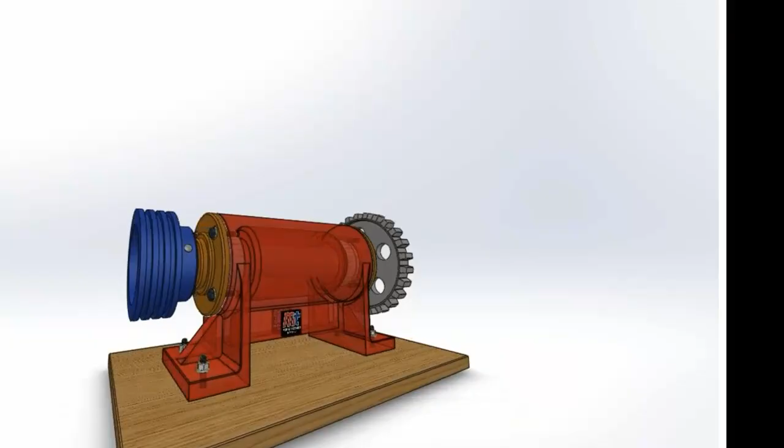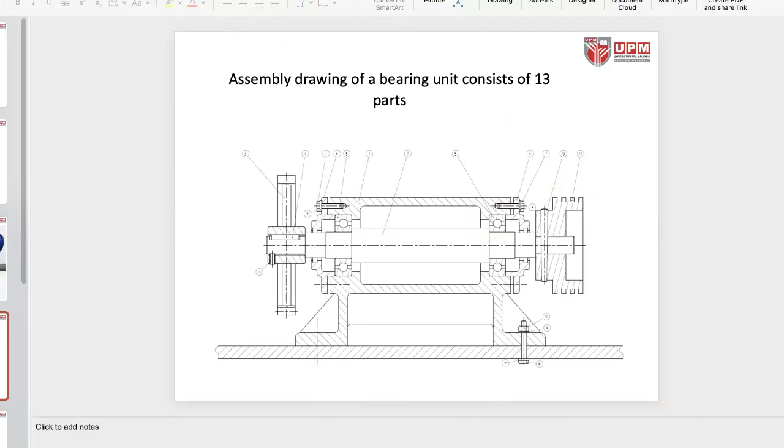Okay. So this is the assembly. We will start with this first guy, which is the base of this. Okay, so I'm going to save this as a picture so that I can insert it into my AutoCAD later. So this is lab number 2, activity number 1.

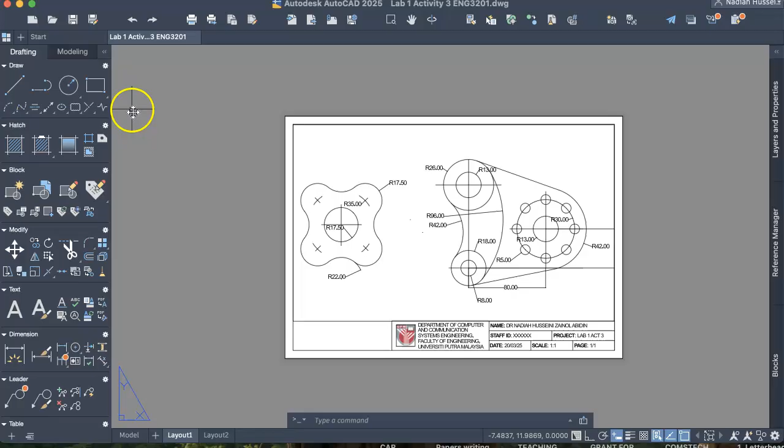Okay, so when you open your AutoCAD, click on File and then Open, and you would initially get Drawing, but you would select Drawing Template instead. And then find the A3 template that you did before, click on that. So you will get your template again. Then remove this because it is a template anyway. So we don't need that object anymore. And then we can work in model space as usual.

Okay, so now I'm going to insert. Where's the insert button? I am going to insert. Is it drawing? Okay, I can't see. Okay, remove this. Okay.

I think there's some construction going on, so I really apologize for the extra noise.

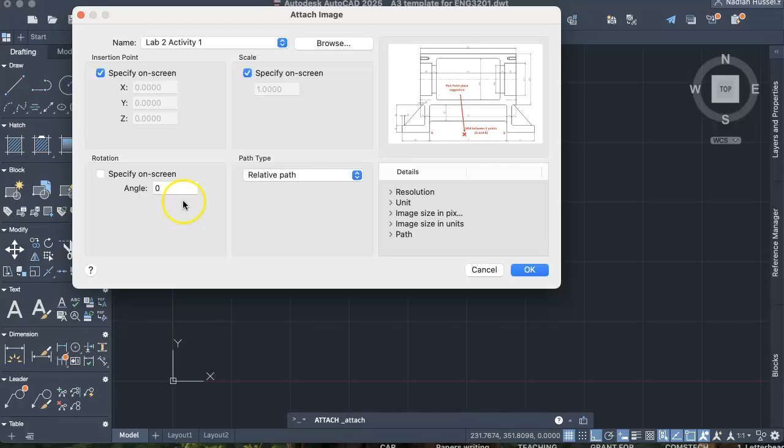What was I gonna do? I was gonna open the lab diagram. Specify on screen. Okay. Okay, so hopefully we can see better. Alright, so please refer to the PDF or the file in PutraBlast if this is not very clear in YouTube. So we will start with this main box over here.

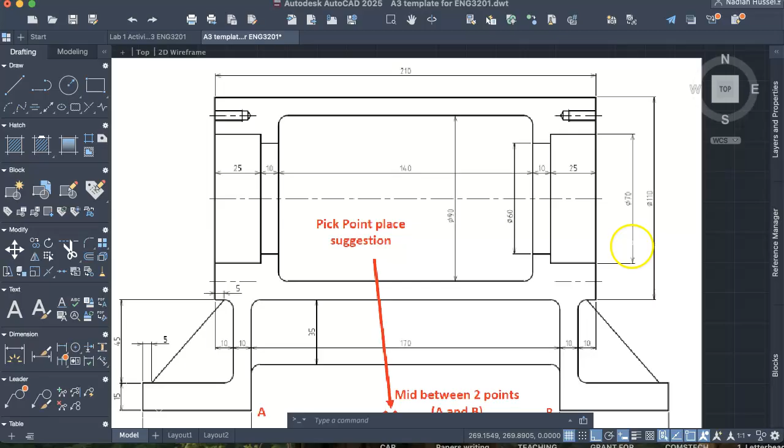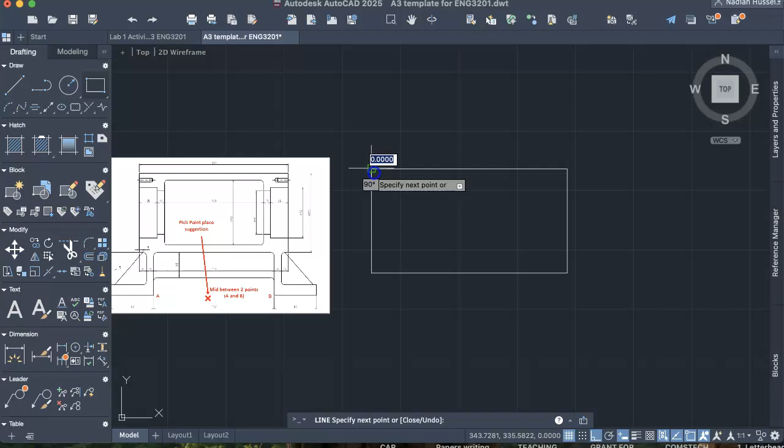So this box at the top has a size of 210 in the x-axis and 110 in the y-axis. So that is what we're going to do first, 110 and 210. 210 to the right. And make sure we're working in ortho mode. So 210. And then going down, it is 110. So this will be my box, my initial box. Make sure you're following the guide so that your dimensions are accurate.

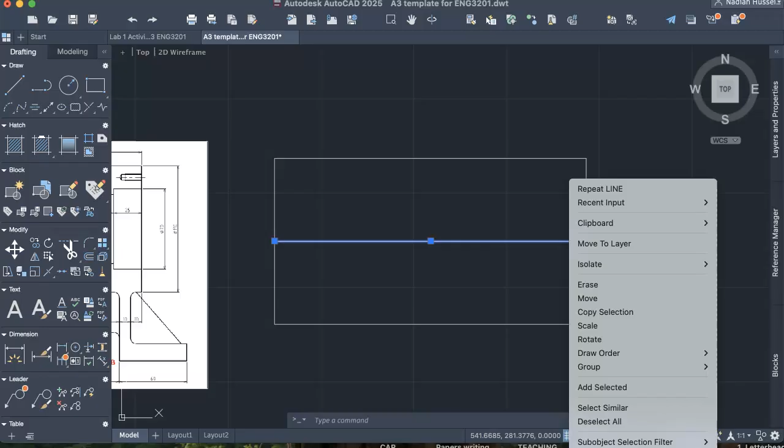Okay, and then let's make our center line. Our center line is at the midpoint of this 110. Okay, let's just do that first. Our center line at the midpoint. Then I'm going to click on Properties and then Line Type. And it should load center 0.5. Okay. Properties, I did not select it yet. So you can see here, it's still selecting continuous. My bad. So now it's center line.

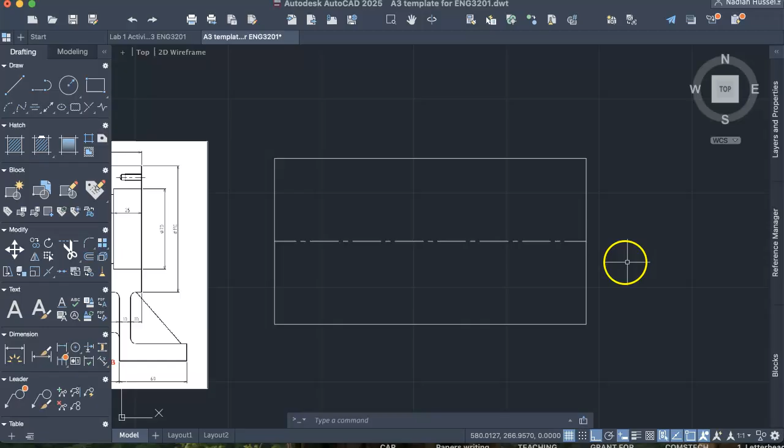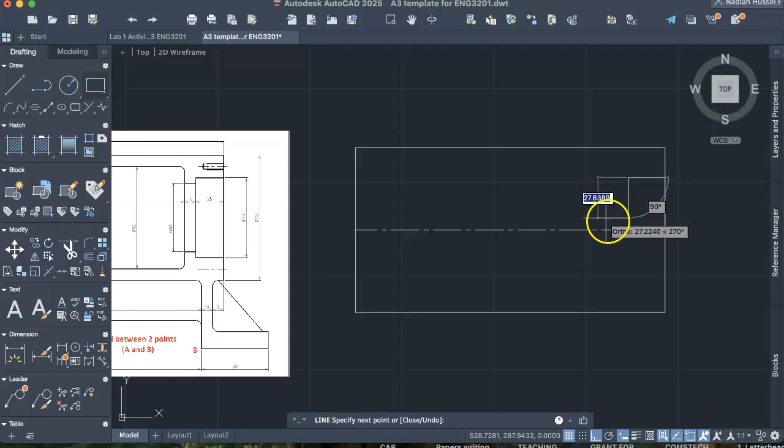Okay, so now the next part that we need to do is make this 70 in diameter box. So it says diameter because it's actually a circle or a cylinder viewed from the side. That is why we have a cylinder. And then the sides here is 25. Make sure you're still in ortho mode, and this is going to be 70 and then 25.

Okay, and the next part is making this; this has a diameter of 60. So again, it is symmetrical, 60 diameter. The midpoint is still the same as the 70 diameter. So we're going to extend upwards by 30 and extend downwards by 30. And then this will be 10 in the x-axis.

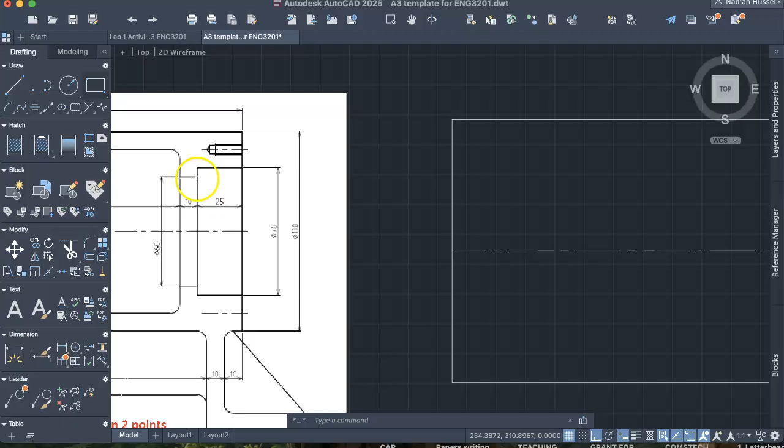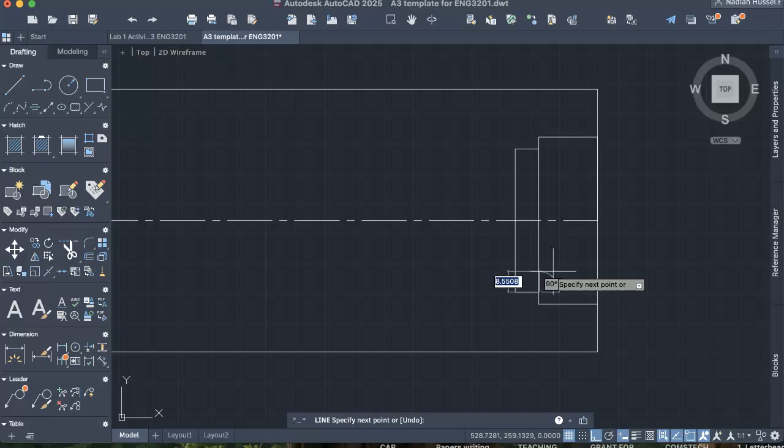So extending by 10 first. Make sure you're in ortho mode. Enter. Going upwards by 30. And then 10. And then I can do this in offset. I can just do this manually. Doesn't matter as long as you know what you're doing. As long as it's accurate dimensionally, it's fine. So we have that. Okay, what's next?

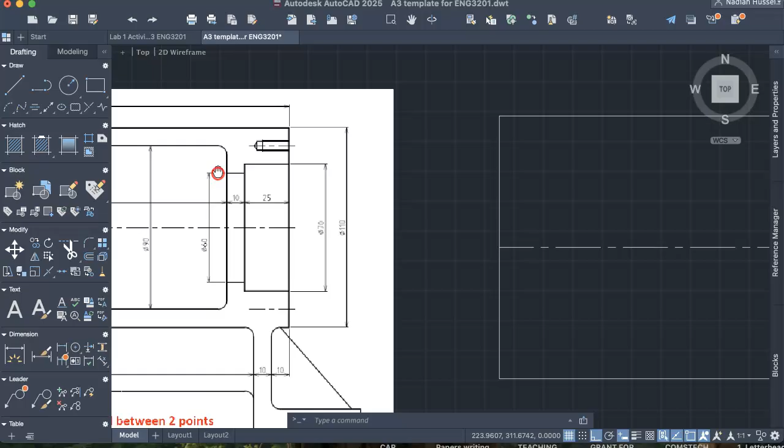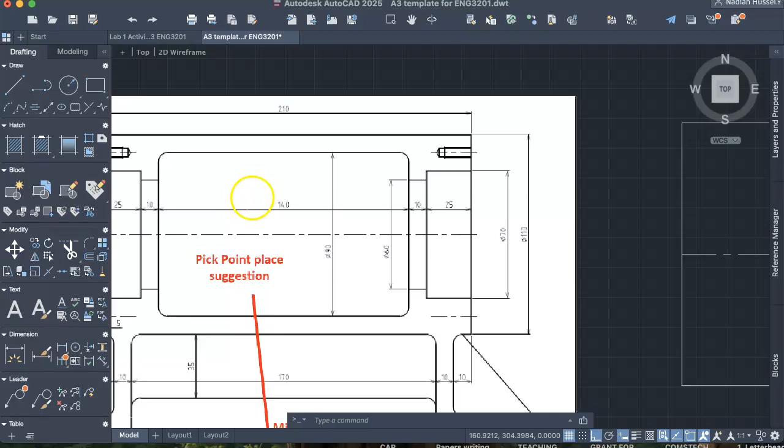Now this guy, 70. So at this point this length would be 35, right? Okay, let's move forward from here. This would be a box of size 90. It still has the same midpoint, 90, and this is 140. 90 and 140.

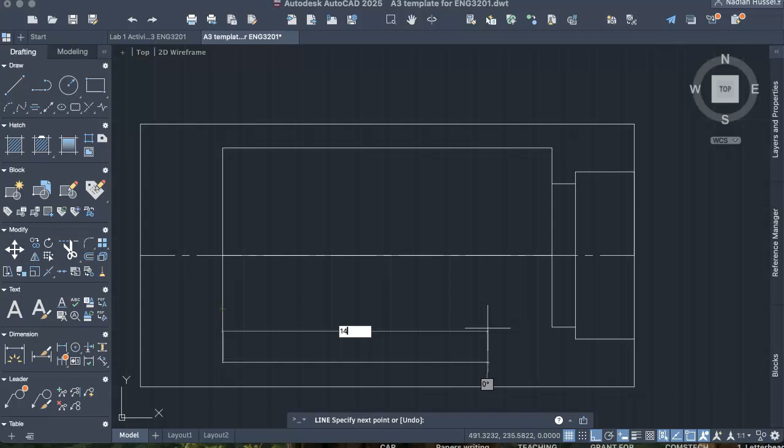We'll start here. I'm going to make a 90. Oh, I think that was 140. So 140 in the x-axis, and then 90, which means that it's going to be 45 going upwards, and then 140 going in the x-axis. I'm going to continue. That would be 45, 140, and going upwards 45. So that is the box that we're working with.

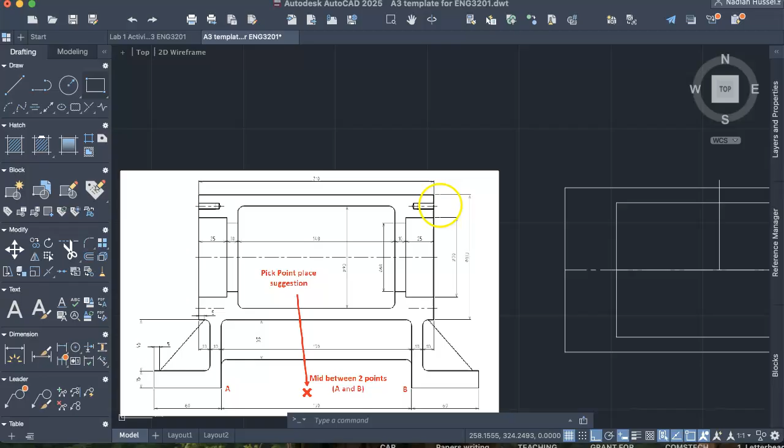Now, where is my midpoint? Do I have it? I'm going to make a midpoint really quick. I want to mirror this because it's basically the same thing. Let's see. Is it really the same thing? It should be. So we can do this part first, or we can mirror this guy first. I guess we're going to mirror it first. We can figure out this one later.

Before we can mirror it, is there anything else that we need to do? I think we are okay. So let's mirror it at this midpoint. So mirror.

I really do apologize for the construction sounds.

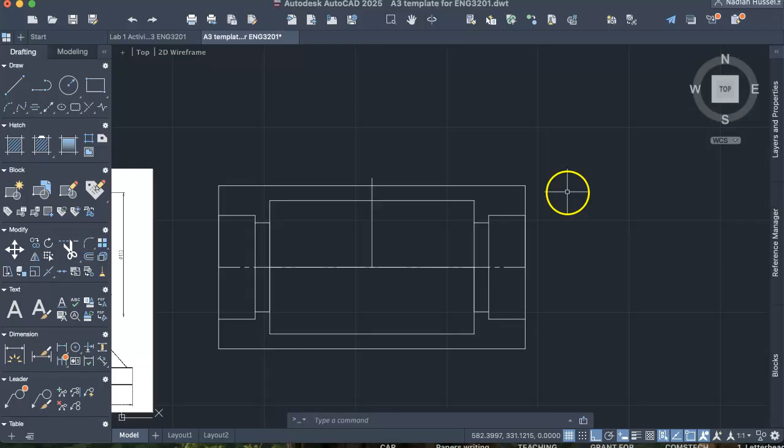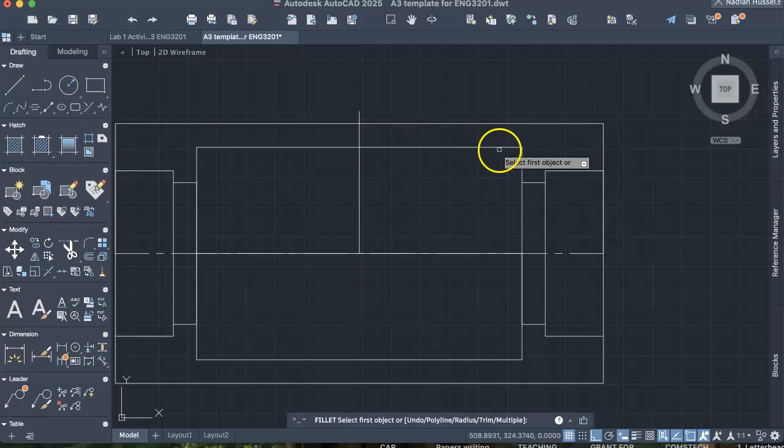Enter. So now you have a similar structure on the other side. Okay, so this fillet, I don't think we are given the dimensions, but we will try and figure it out. Let's try with a fillet radius of 2.5 first and see if it looks okay. Yeah, pretty accurate. So again, I'm gonna do fillet.

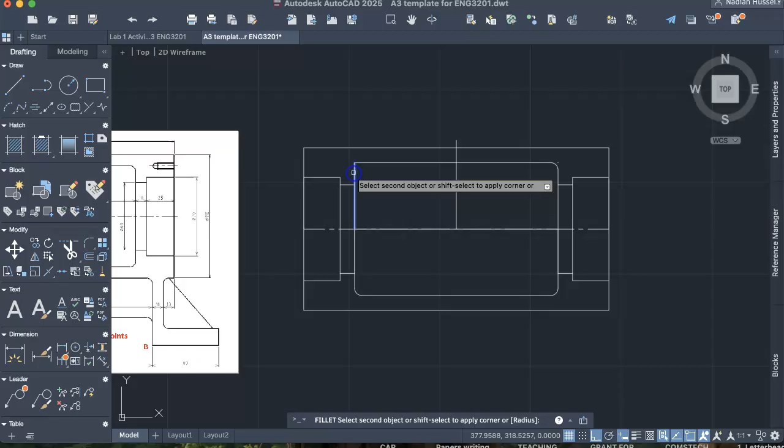Okay, to be honest, I don't remember what the radius is. Let me double check. Fillet radius. Right now, the fillet radius is 5. Enter. Okay, so it's not 2.5, it's 5. Then we have a small dot here, which I don't know why. Let's get rid of that. So now our fillet is successfully done. Let's make this guy.

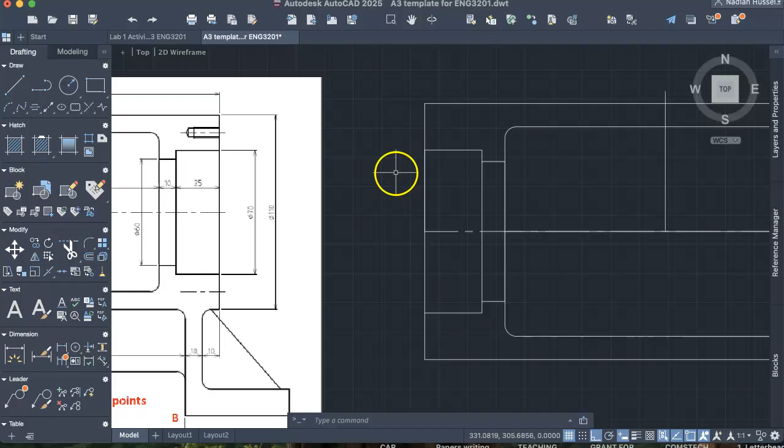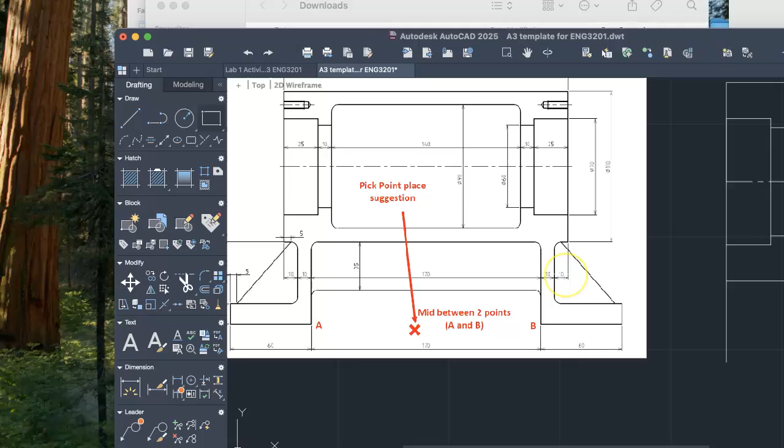Now let's do the lower part of this diagram. Okay, so we will start like how we started the top box. Let's try to imagine that this is a box as well. So this box, if we are extending it here, it is going to be 20 plus 170 plus 20 on this side, which is basically 40 plus 170, which is 210, similar to the box above, but the y-axis of this box would be 45 plus 15, which means that it's 60 instead.

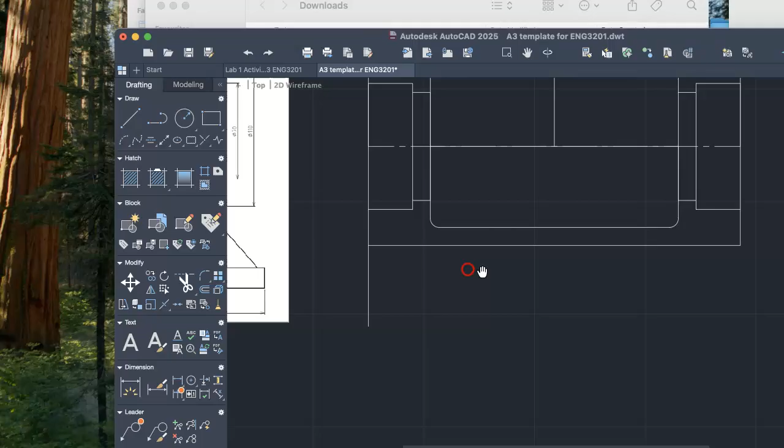So let's make that box first. So the box will have a similar x-axis, but now our length will be very specific to 60. Why is it not working? My object snap is not turned on. Okay. I am going to make a line that is 60. I'm just making this box, following the guide, making sure that everything is accurate. That is my box. Okay.

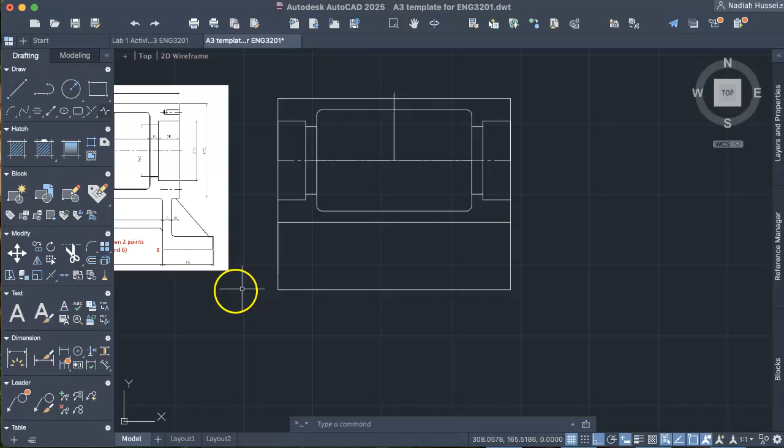What should be next? And then we have another box inside this box, which is 35 from the top. And then it is symmetrical by 170, which means that 170 divided by 2 would be 85. So 35, 85. So find the midpoint, go down by 35, and then I'm going to make a line to the right, 85. Make sure I am in ortho mode and I am still 35, so that it is still correct.

I'm going to make the same thing over here. I can mirror that, but I can also do it manually. 35. Whoopsie, I think I got that one wrong. 35. Always make sure you are in ortho mode. So we have the inside part done.

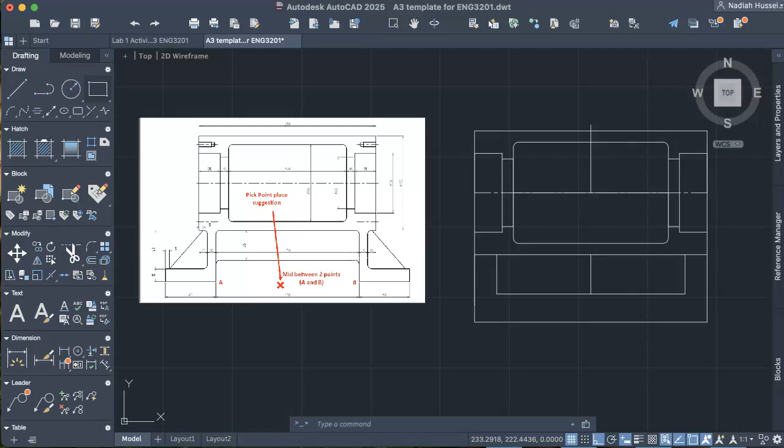So this little thing is 15 going upwards. I'm trying to make this hollow part, 15 going upwards, and I need to go 60. 60, make sure you're in ortho mode. 60 going up, 15, and then this would be 170 going down. That would be 15 again.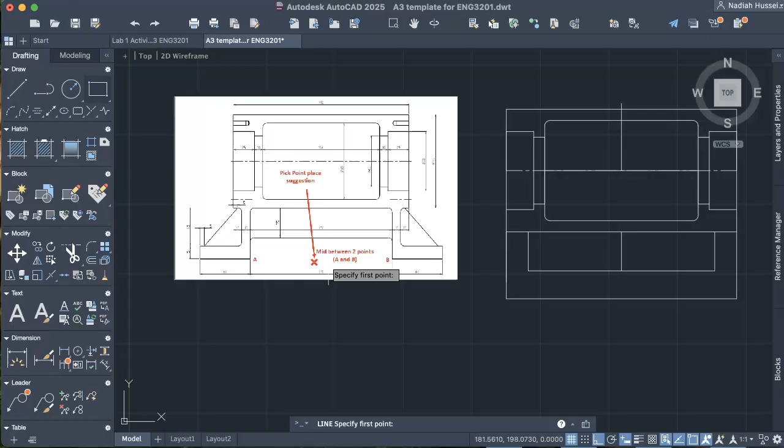Oh, my bad. Oh, I think I got this one wrong. Okay, let me try again. So it's not 60 from here, it's 60 from this side, which I did not do yet. So that was the mistake. Okay. So 60, we have, this is 20, so I need another 40 here. Alright.

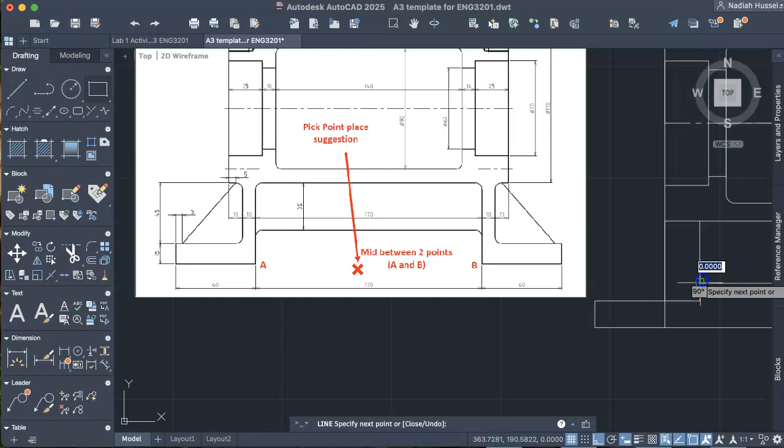I'm just gonna make it first. And then I'm going to extend by 15. And this is going to be 60. Like that. So this is supposed to be 15. Let me just double check really quick. 15. And this is supposed to be 60.

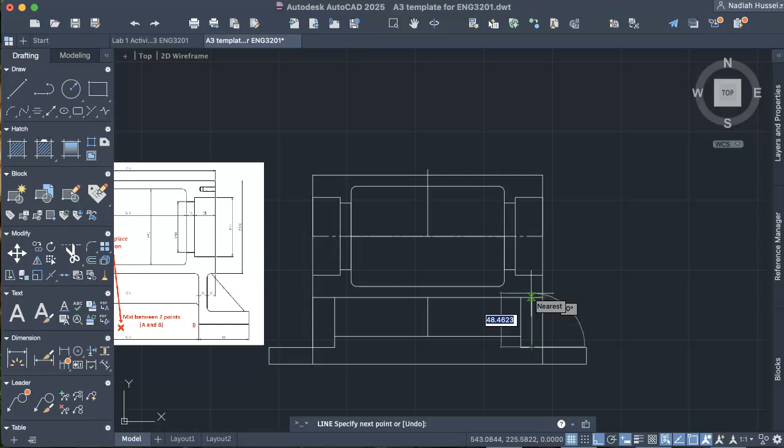Okay, again, extending this by 40. Going upwards by 15 and going inside by 60. I would connect this like that. And then this from here to here would be 10. And going upwards, the distance would be 45 if everything is correct. Make sure you're still in ortho mode.

Okay, so it looks a little bit confusing here. Let's trim it and figure out if we are doing things correctly.

We need this. Where is our 15? This is our 15. Like that. This should have been extended. So that is wrong for me to get rid of. I should have done mirror. My bad. So 60. And then trim.

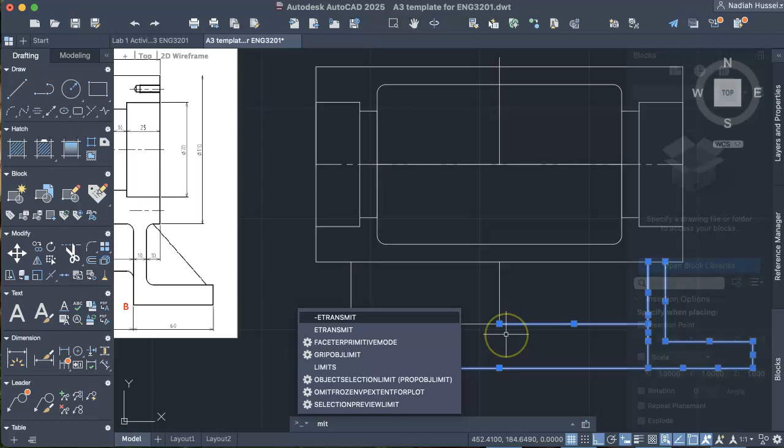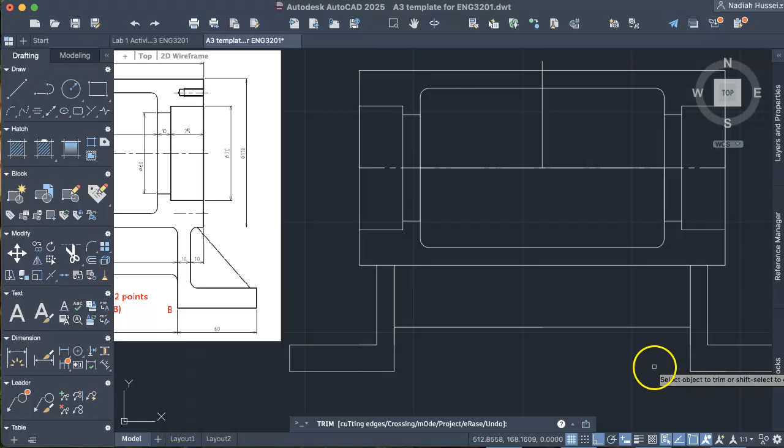Okay, we haven't done this side. Should we do mirror? I think we should. Let's get rid of this. Okay. So I want to just select this. Ta-da. Yay. Okay. Get rid of all the unnecessary lines. This is also unnecessary, and this is also unnecessary. So this is what we have. A little bit longer than usual, but we are still adapting to AutoCAD, right?

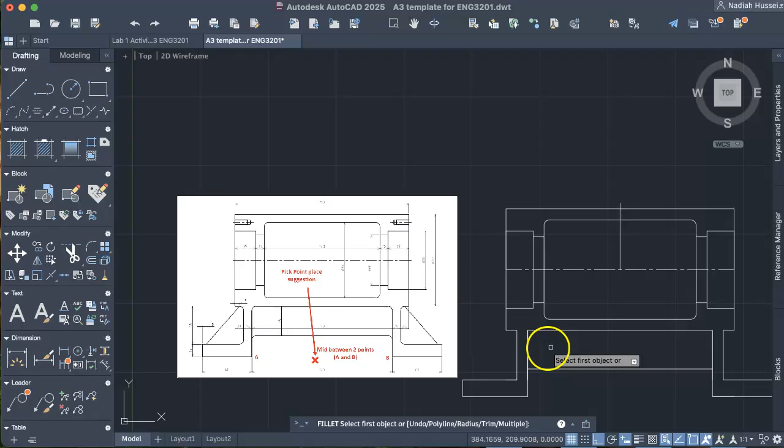Okay. So I have another line there, extra lines. We don't want extra lines. Okay, so should be good. At this point now we do the fillet. We don't have this, and we don't have this one as well. Let's do fillet now. So here the fillet would be, I would guess it's 5. So let's see if that is correct. Looks about right, right? And this is an extra line that we can get rid of.

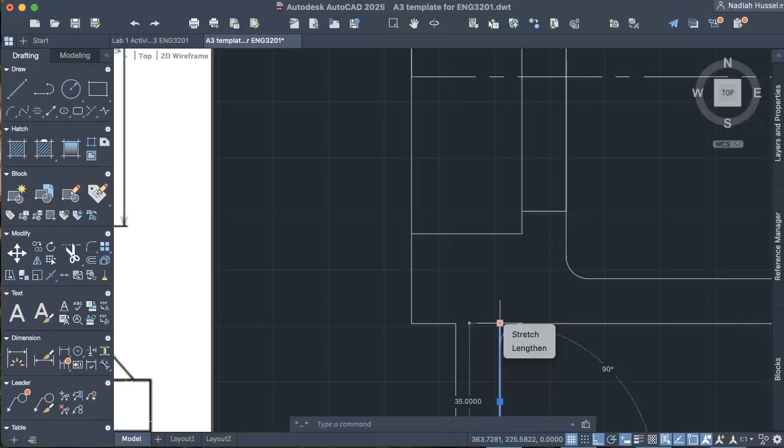Okay, I want to get rid of you. Why is it not getting rid of? Let's just use trim. Extra lines can be removed. Okay, and then fillet for here and here. Fillet for here and here. And then again, here and here. Again, here and here. Like that. Again, trim any lines that are unwanted. I have another line here, but it seems like we can't get rid of it. It's okay.

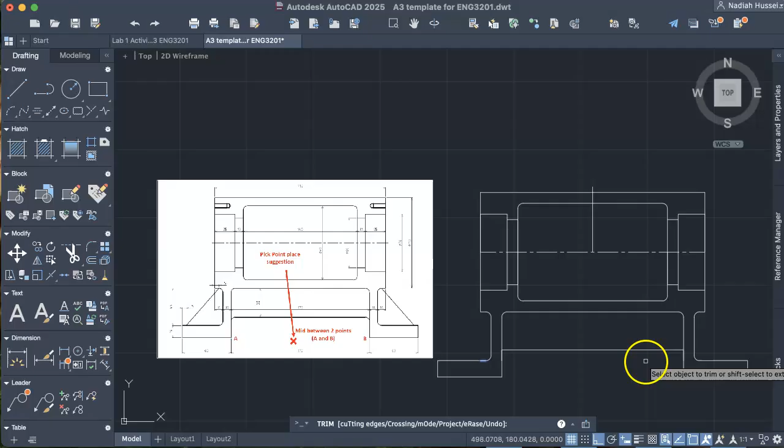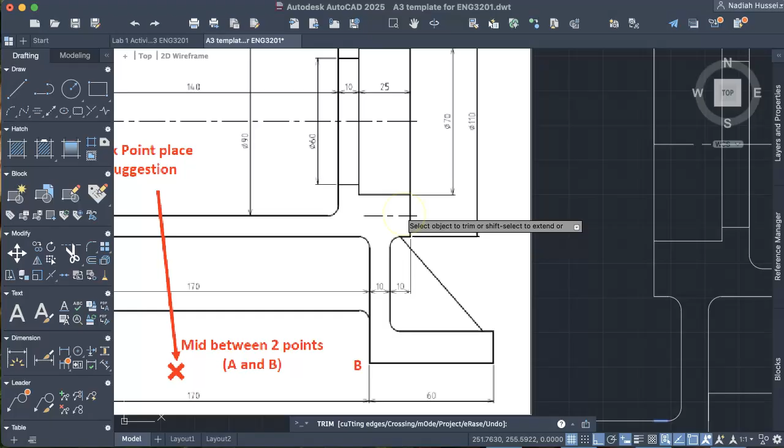Okay, what are we missing? Okay, we are missing this line. So we have this. We know that this is 110 minus 70 divided by 2. So that will give me 40 divided by 2 is going to be 20 here. So this is going to be 10 from down here, up here 10, because the entire thing is 20 from here. Are we using this? Not really. What do we need? Let's take a look over here.

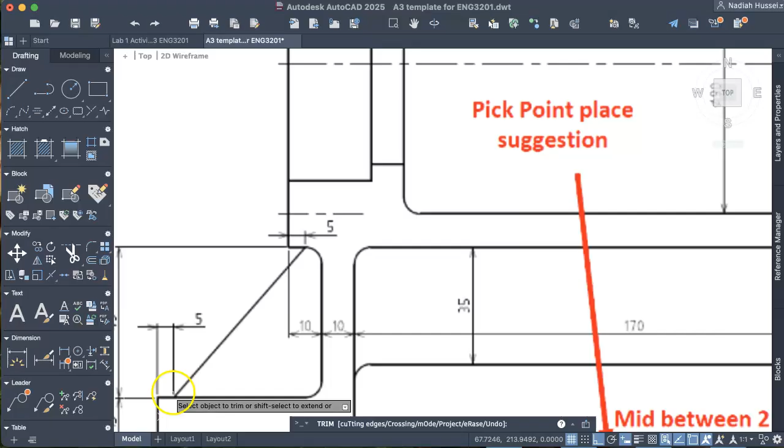From the edge, go inside by 5. And then from here, this is also go inside by 5. I think we need to mark these places first so that we can actually make the line correctly. So from the edge, make a line by 5. Just making a small indicator there. Line 5. Making a small indicator there as well. So now we type in line, or you can just click on line. Like that. And then you can trim whatever is not supposed to be there.

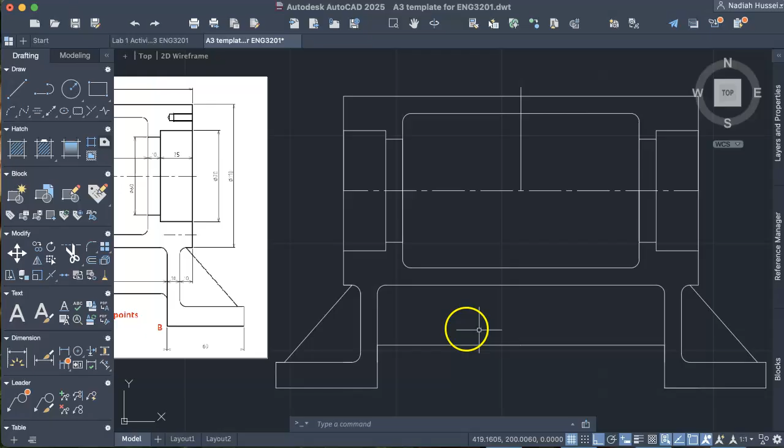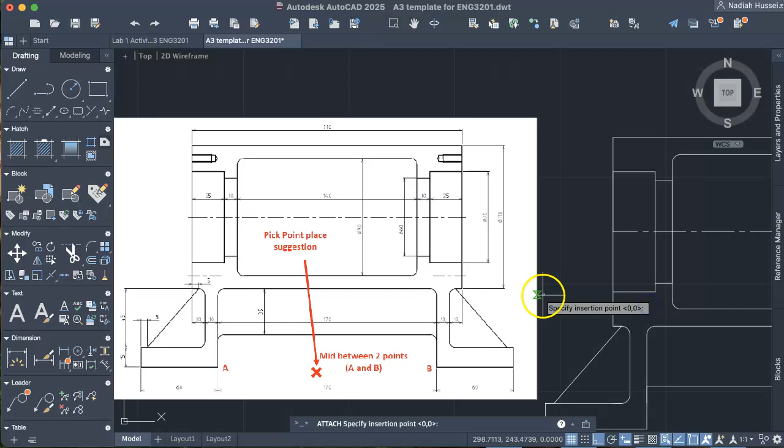And you can actually mirror this if you are lazy to do it again. I'm going to select this object and I'm going to find my midpoints. And there you have it. Okay, I think we got the box covered. We need to cover this part. Now, the dimensions are not given, but I have uploaded on PutraBlast the dimensions that you can follow. So this is how it looks like. So this is the dimension. So we are going to work with this.

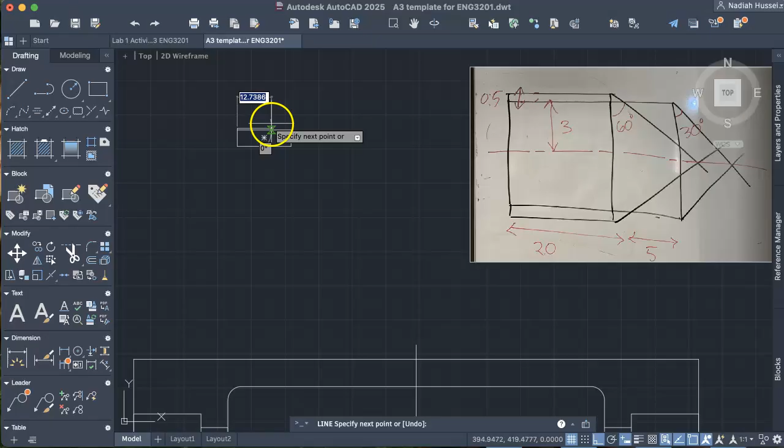So here we have a box that is 3. Actually, it's the radius, but that's fine. 3, 20, and 5. Okay. So this is going to be 20,6. So that's your box. And then you have something that is 0.5 up here. Extends here as well. 0.5. This is very small, so you can zoom in. And then make sure you're following the guide. Like so. And doing the same thing. 0.5 down here. Going to the right.

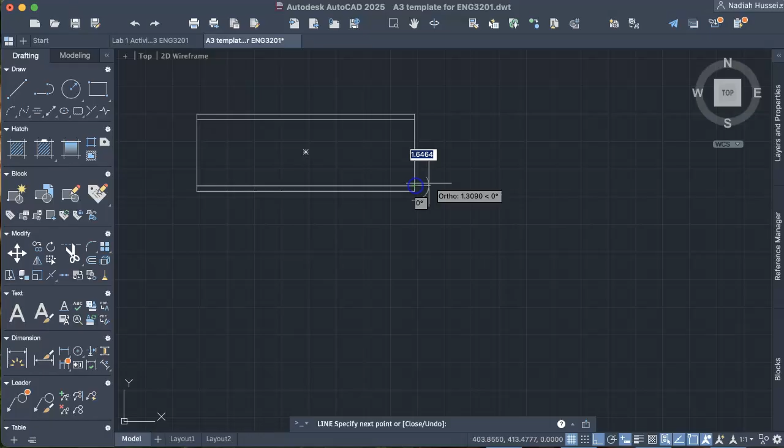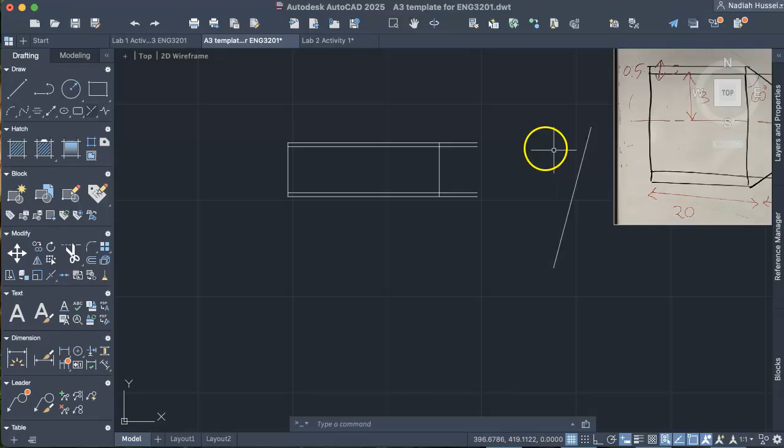Following the guide. Okay, so we want to make a line that is 5. And then another line that is 5. Then extending another line 5. This is just a guide. You can make it longer if you like. 5. Okay. So from the diagram, oops, I have a stray line here. This guy is 60 degrees. So we are going to rotate this. Specify the base point, and we are going to specify the rotation angle.

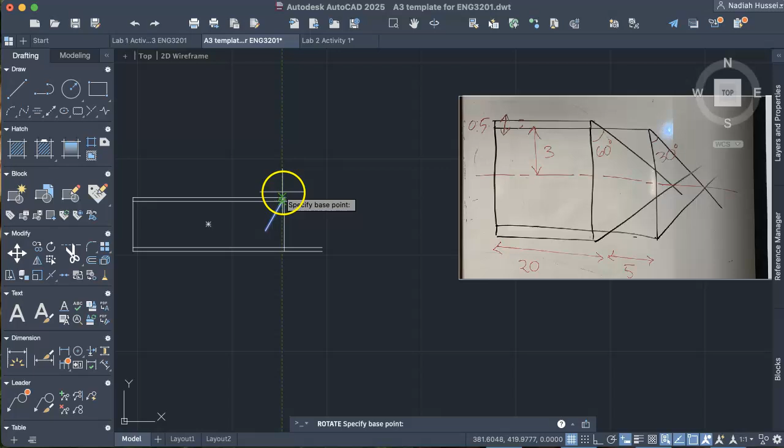So if here is 0, let's try to type in 60 and see what happens. So 60 from here is going upwards. So if we want a 60 over here, we need to make it 270 plus 60, I think. Let's try. Let's rotate it. Rotate base point. Let's try 180 first. Okay, not there yet. Rotate base point 90.

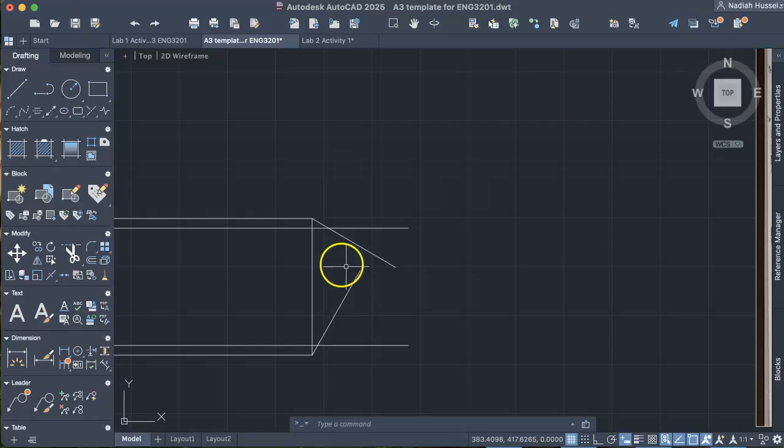So that is 60 plus 270. So we're going to do the same thing over here. So 270 plus 60 is what? 330. 330. Oh, doesn't work. Okay. From here, we know that it's going to be 60. My bad. 60. Why does that not look the same? Okay, we're going to mirror that later. And then from here, we are going to close this box that was 5 from here to here. And then just going to close that box. And then make another line.

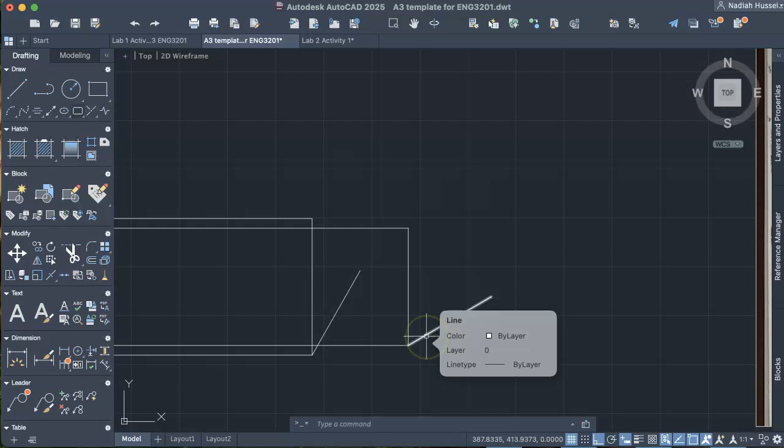That is 5, just as a guide. Make sure you're in ortho mode now. Okay, and then I am going to rotate this. Specify base point, and I'm going to rotate this by 30. But this is 30 here. It's not 30 here. Okay. So this is going to be 90 minus 30, so it's going to be 60.

Okay, so again, I need to explain this. So here, the angle is bigger than the angle here. I put this as 60 and I put this as 30 because the reference point is here, which is not what I want. My reference angle is here, which means that if I put this as 30, 90 minus 30 is 60 over here. It's incorrect. So let's do it again. I'm going to fix this part later.

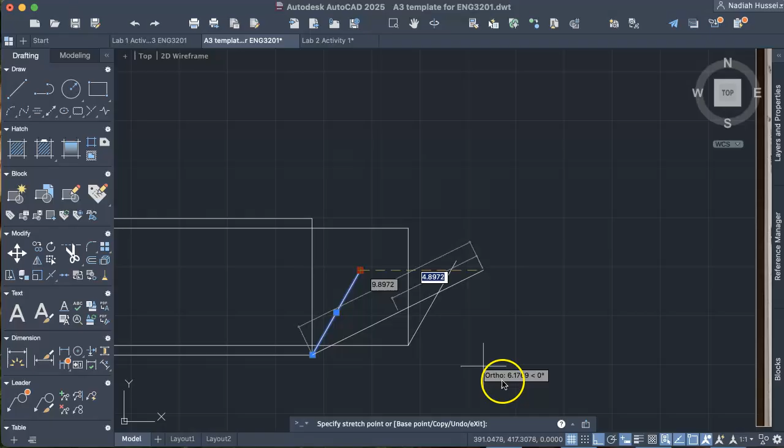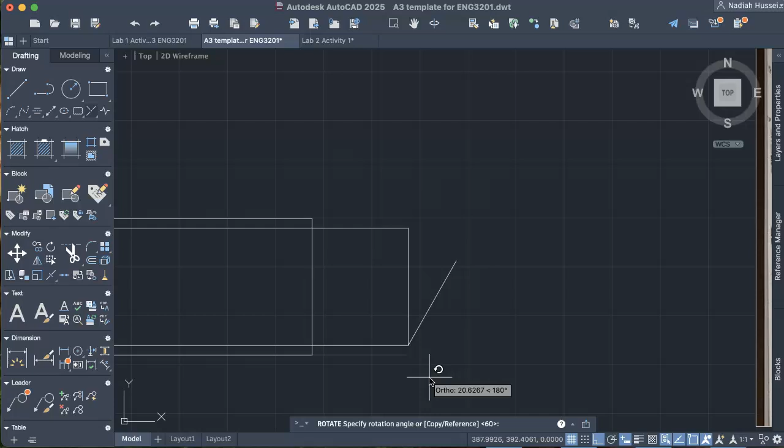So rotate and specify base point. If we want 30 degrees, we should rotate it by 60. Like that. And this guy, let's make it 90 degrees first. Let's just delete it because it's getting complicated. Okay, make another line that is 5. I am going to rotate this. If we want 60, how much should we rotate? We should rotate 30. Oh no, I got this wrong. Make the diagram again.

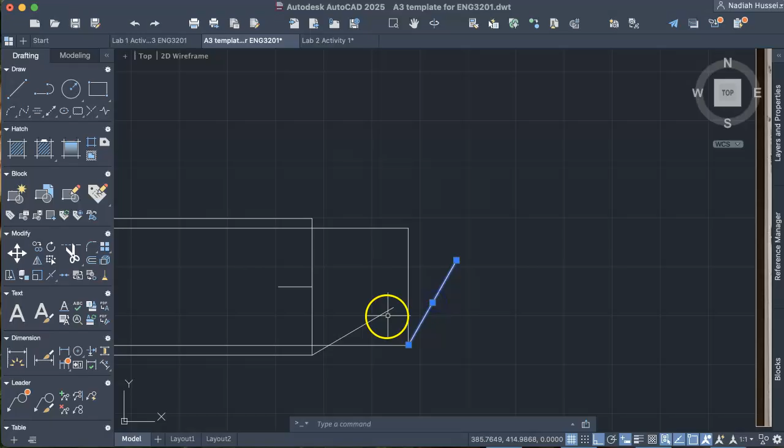Rotate. Okay, again, I want to rotate by 30 because I want over here to be 60. So rotate, specify the base point. It should be 30, like that. Okay. So I want to specify my midpoint so that I can actually mirror this. And then selecting, I'm clicking on command, or for you, I think it's control in Windows. Then mirror. Like that. Now we trim.

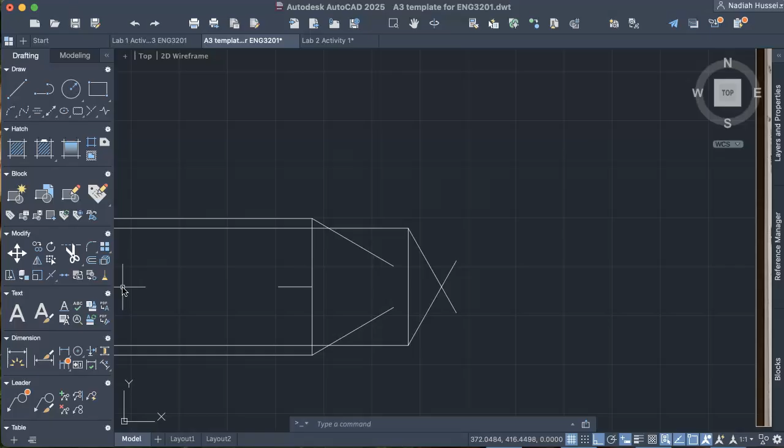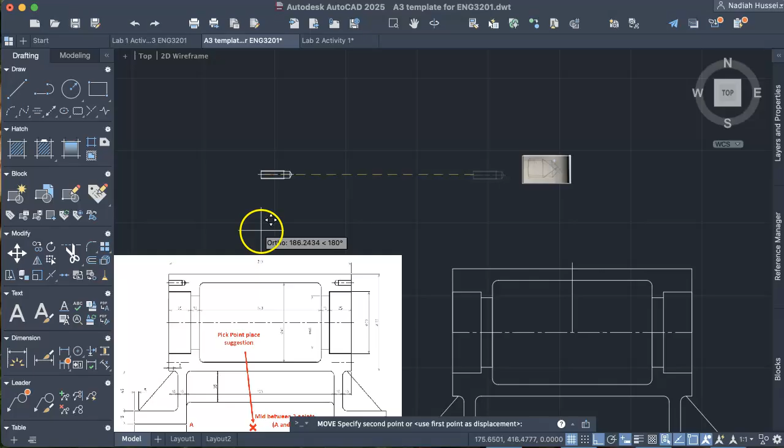Okay, so that is what we have. What else are we missing? We need a center line. Find the midpoint, like that, and then change the properties. Line type would be center 2. Then we can copy this, or maybe move would be better. And I need to specify the base point. But first, I need to figure out how this is situated. We can see that it is aligned to the edge of this box. So we are going to specify the base point to be here, and we are going to align it at the midpoint of this part.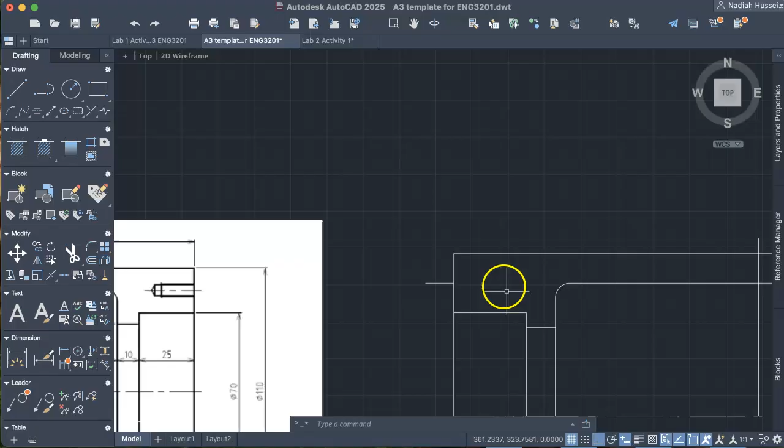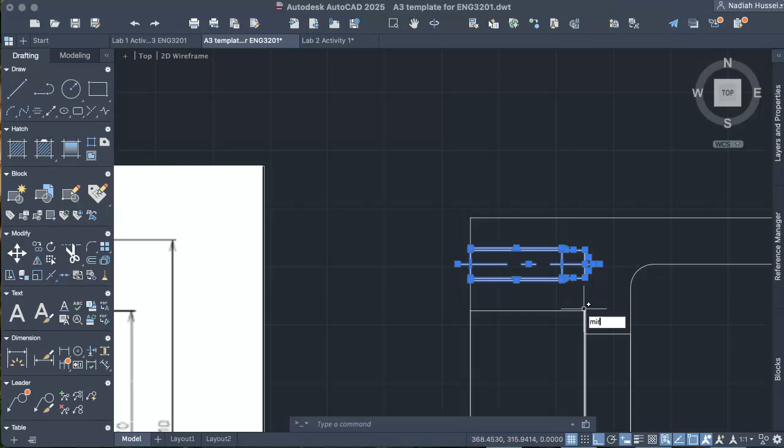Okay, so we actually don't have a midpoint yet, so we have to make one. I'm going to make a line like that just to make things easier. And then we're going to move, specify the base point to be the edge midpoint of this object and align it to there. So now we can get rid of the reference, and we want to mirror this over here like so. So there you have it. Now don't forget to do your dimensions. I'm going to let you figure that out on your own.

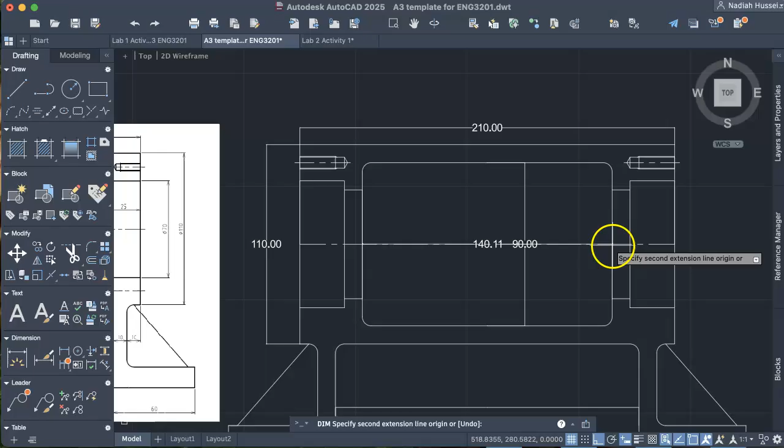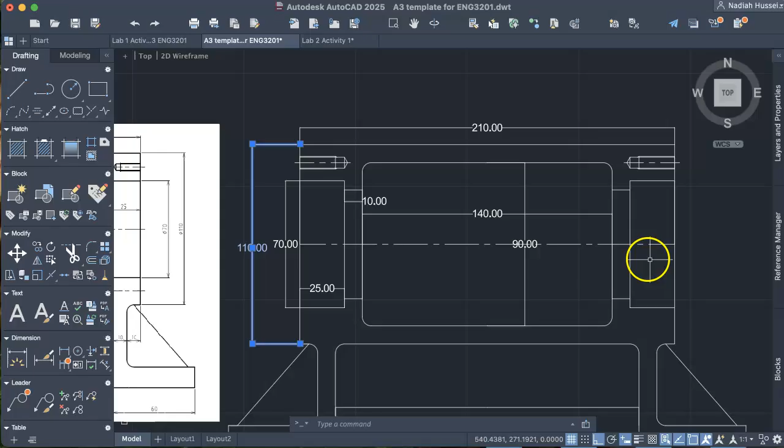We don't have this. I'm just going to do a little bit, okay? 210, and then this is 90, wrong. That should be 110, and then from here to here is 90, from here to here is 140, from here to here is 10, from here to here is 25, from here to here is 70. So I can adjust this, make this a bit to the left. Okay, and I can also label this.

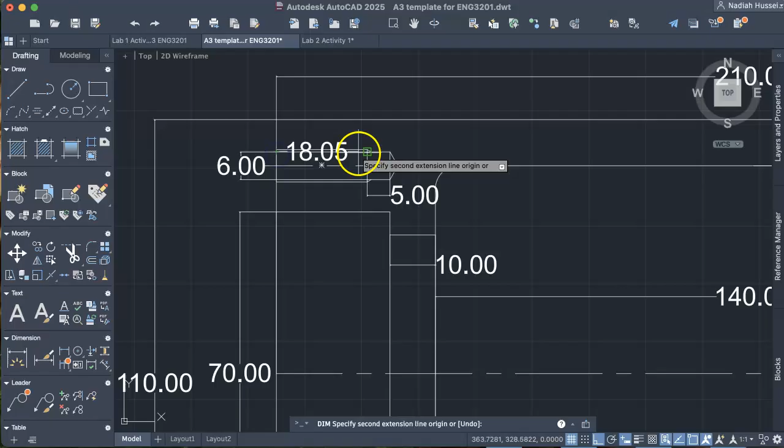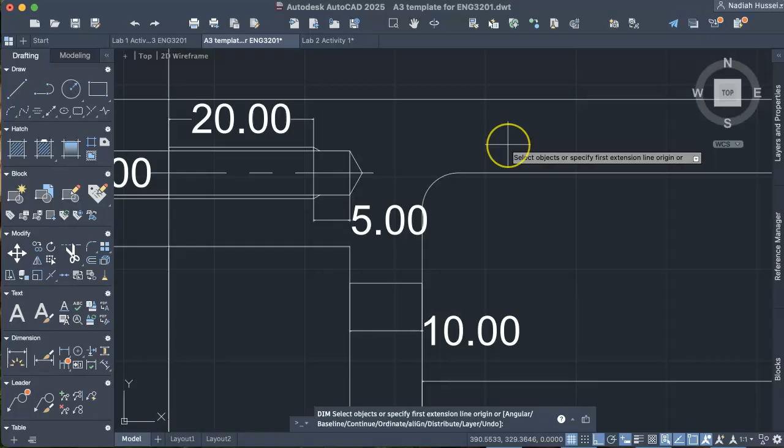This is 6. This is a 5. This is a 20. This is a 0.5. So 1.73, actually not specified. We need to specify the angle. Okay, what else? Over here to here is 5. Over here to here is also 5. From here to here is 35. Here to here is 170. Here to here is 60.

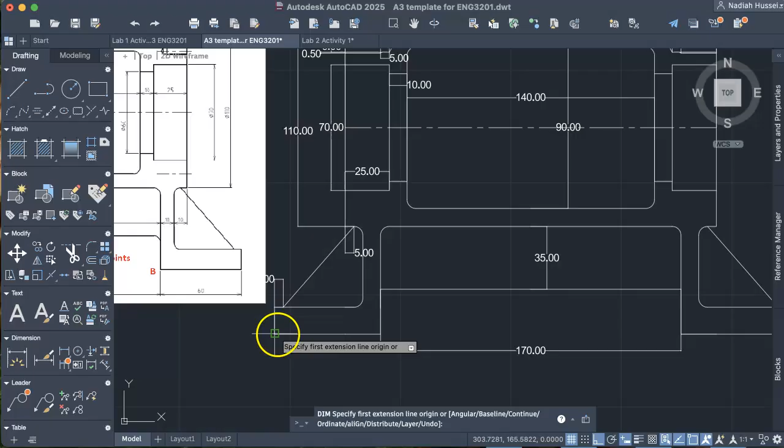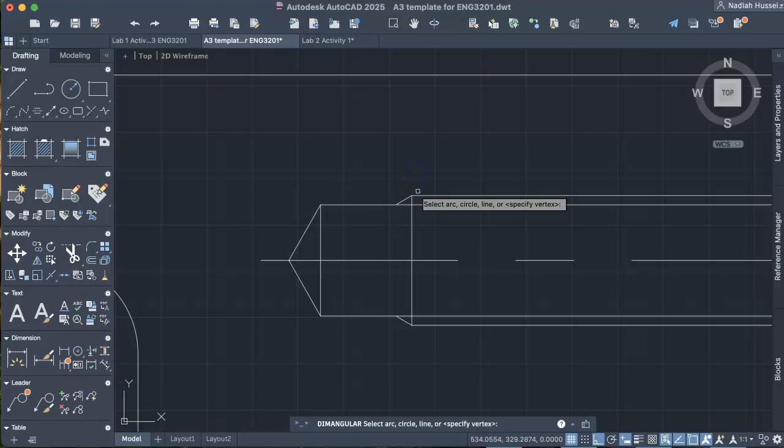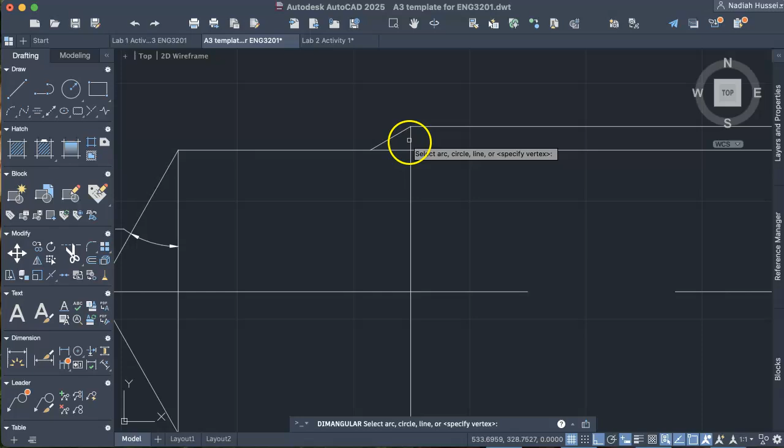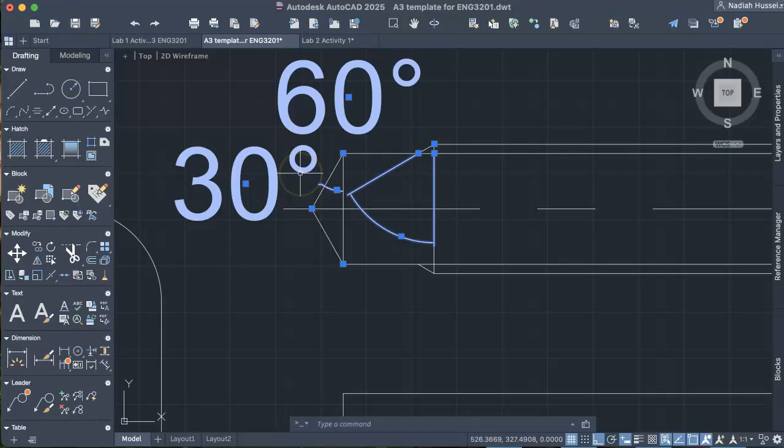Angles, let's do this over here. The command is dimang. Sounds wrong, but it is dimang or dim angular. So select arc. 30. Again. This is going to be a bit hard. Do you see that arc? Yeah. 30. So this is very huge. Let's move it a bit. And then this guy. Okay, I'm not gonna touch the 30. So here it's telling us this angle is 60. This angle is 30.

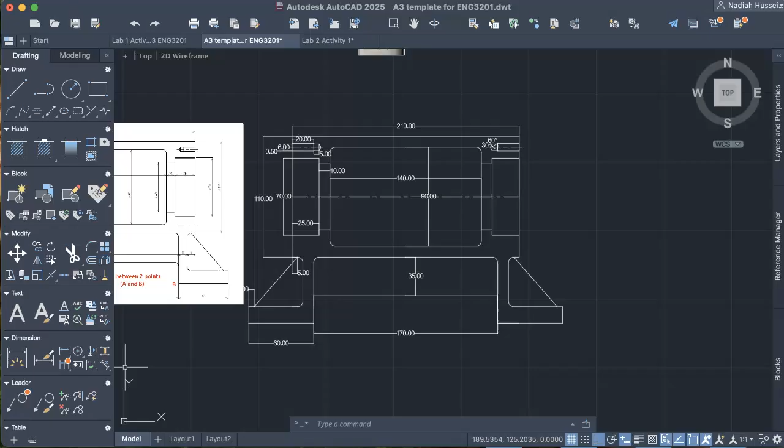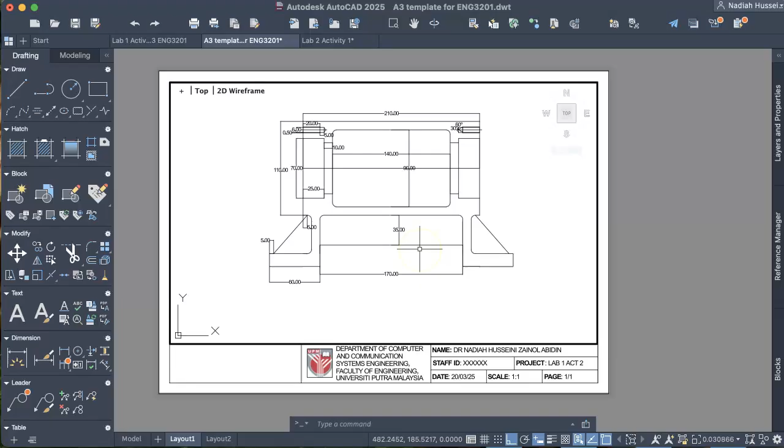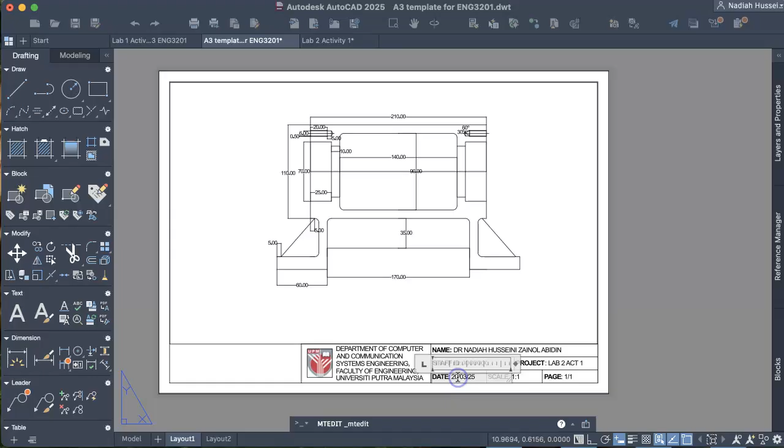Okay, so that is it for activity number 1. Now you can get rid of this diagram. Delete and make sure this looks decent here. Like that. I'm gonna just make it a bit smaller. You can adjust this later. Make sure this is correct. Paper space. Oopsie. Paper space. And this should be lab number 2, activity number 1, and today is 25. Okay, that is it for activity number 1, lab number 2.